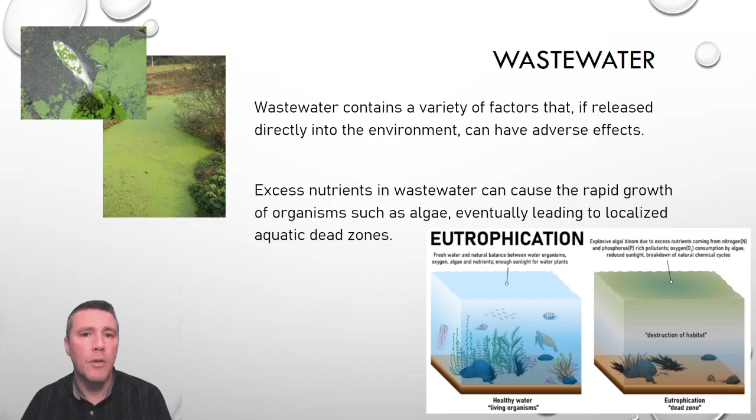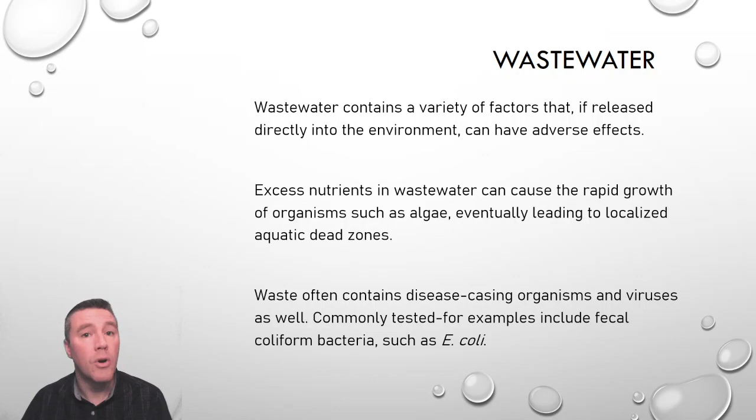The third concern with wastewater is the pathogens it often carries. Disease-causing organisms are responsible for a number of diseases that can be contracted by humans or other organisms coming into contact with or drinking the contaminated water. Such pathogens cause things like cholera, hepatitis, diarrhea, and other gastrointestinal illnesses.

Hepatitis is becoming increasingly common, even in industrialized nations like the US, due to inadequate sanitation practices, especially in restaurants. Cholera, more common in developing nations, claims thousands of lives annually.

Since it should now be clear that wastewater must be dealt with in a special way to mitigate the potential harm caused by its contents, what is done to treat it?

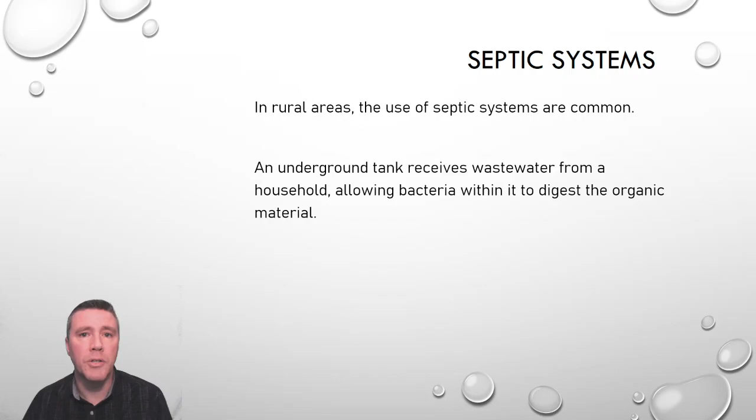In rural areas, septic systems are the most commonly employed mechanisms to remediate sewage. Homes essentially treat the wastewater generated within them using an underground system. A septic tank is a large container that receives wastewater from the house. A variety of capacities of these tanks are available to consumers based on the volume of waste that the home could produce.

Buried near the home, the sewage flows out of the house with gravity and into the septic tank. Solids settle to the bottom, and over time, bacteria in the tank break down the wastes. The fairly clear water that forms over time, called effluent, moves out of the septic tank, again with gravity, and into the leach field. Made of a combination of perforated pipes, the leach field allows water to seep out into the surrounding soil.

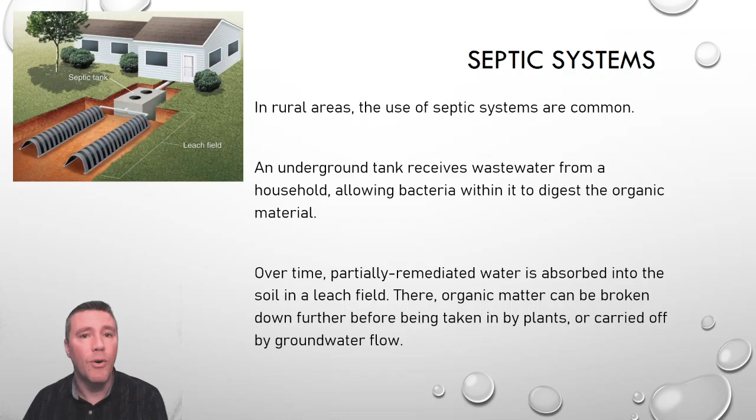Where it can be remediated and filtered further by soil microbes. The water can then be carried off by groundwater flow, taken in by plants, or end up in surface bodies of water.

Although household septic systems work well on a small scale, especially in rural, low-density areas, they are simply not feasible for urban or suburban environments. The higher population densities and lower availability of open land demand a different strategy.

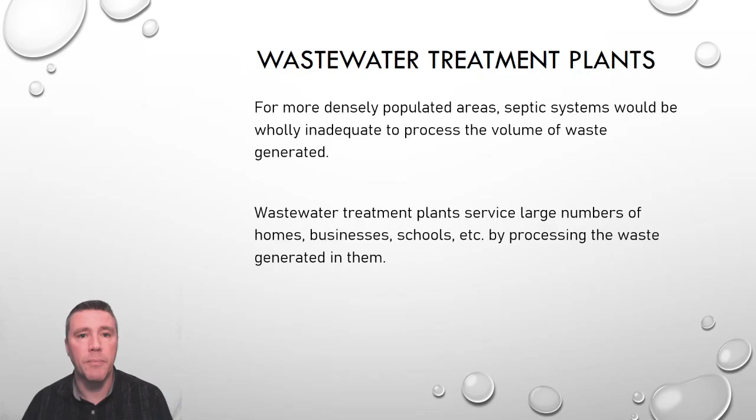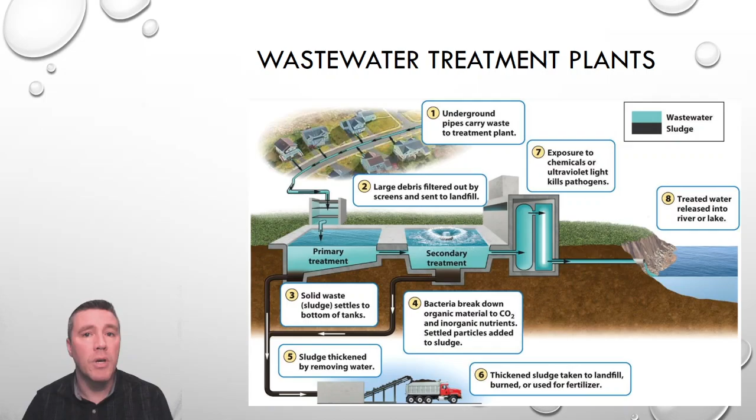In developed nations, centralized sewage treatment plants are that strategy. In a traditional wastewater plant, the wastewater from homes, schools, and businesses is treated in a multi-step process before the clean water is released back into the environment. Although there are variations in design and techniques used to treat the wastewater, all modern sewage treatment plants rely on the same principles.

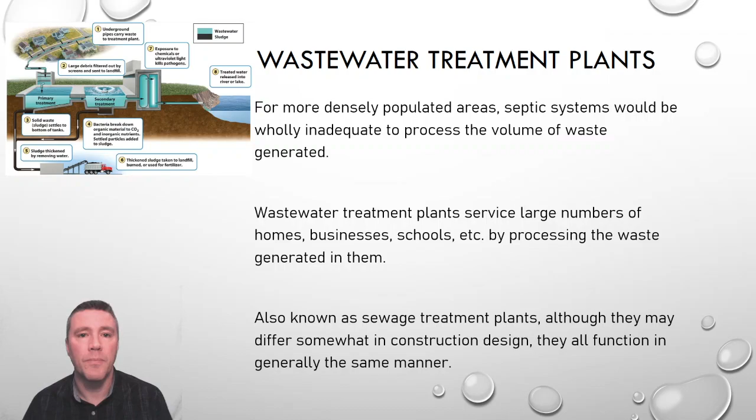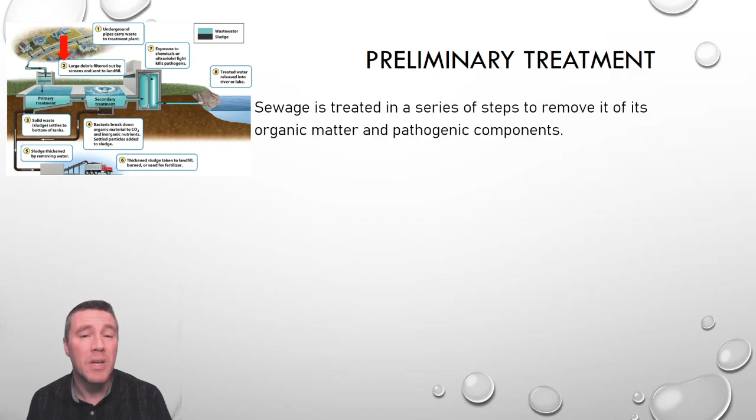Before any treatment of waste can begin, a filtration step exists as pre-treatment of the water. This screening process prevents large objects from entering the plant's plumbing system that may damage it and the pumps that push water through it. Twigs and tree branches, disposable wipes, rocks, small stones and gravel, and plastic waste, along with anything you can imagine people flushing down drains at home, are blocked in this preliminary treatment. Other non-waste materials settle out in the grit chamber before the sewage to be treated continues on to primary treatment.

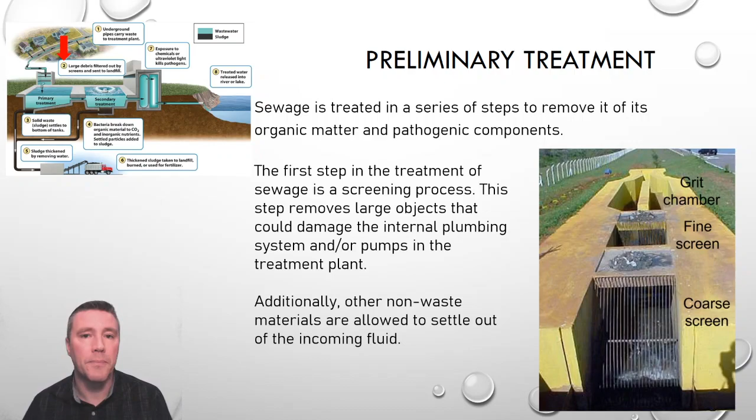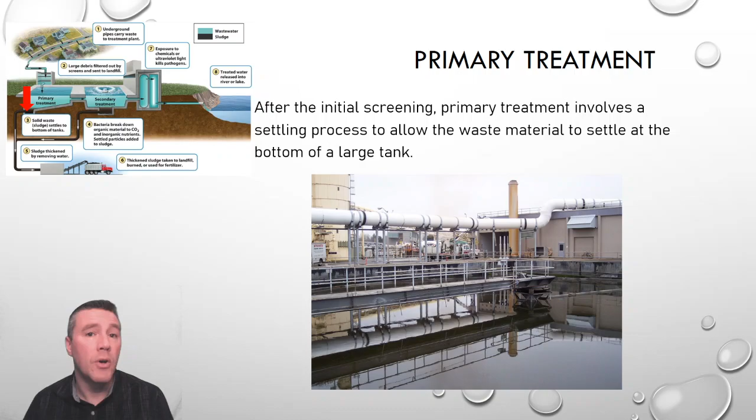The next step in the treatment process allows the waste to settle at the bottom of a large tank. The more dense, solid material is allowed to sink to the bottom of the tank, whereas oils and fats rise to the top due to their lower density, and are then skimmed off. Since settling tanks are usually equipped with mechanically driven scrapers, they continually drive the collected sludge toward a hopper in the base of the tank, where it is then pumped to sludge treatment facilities before being hauled away, often into a landfill.

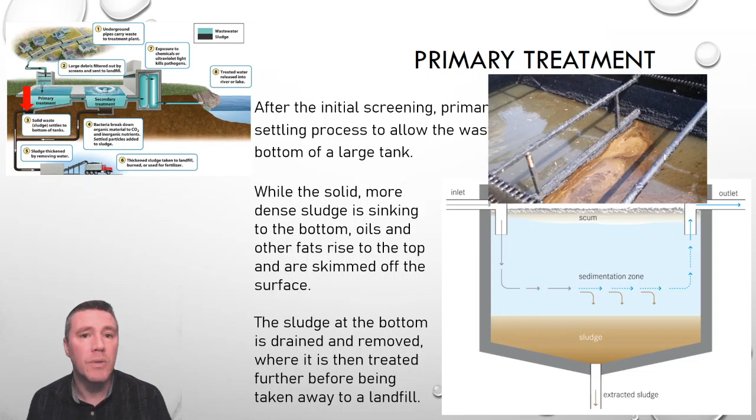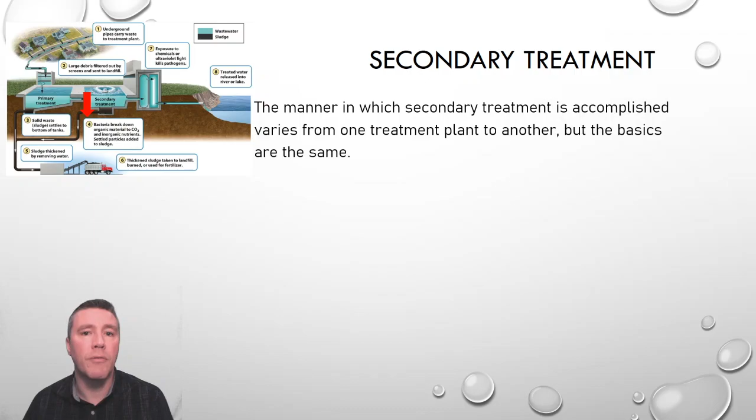Secondary treatment, regardless of the specifics on how it is accomplished, always involves the employment of bacteria to break down the organic material in the wastewater. The bacterial population, fed by the constant input of sewage, grows in biomass and sinks to the bottom of the tank.

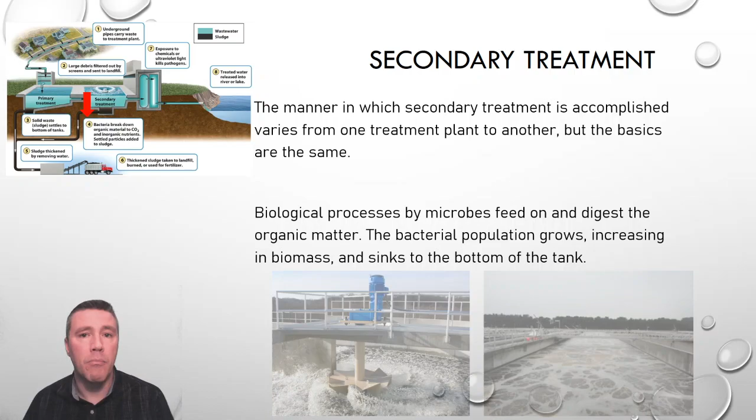Secondary treatment typically includes a method to aerate the water being treated. This adds oxygen to the water, promoting the growth of aerobic bacteria, which produce less offensive odors than anaerobic bacteria do. The remaining water, mostly clear and nearly free of pollutants, moves on to the final stages of wastewater treatment.

Disinfection of treated sewage may be attempted to kill pathogens before being released into the environment. The purpose of disinfection in the treatment of sewage is to substantially reduce the number of pathogens in the water before it is discharged back into the environment, or reused. The effectiveness of disinfection depends on the quality of the water being treated, the type of disinfection used, the disinfectant dosage or duration, and other environmental variables. For example, water with high turbidity will be treated less successfully since solid matter can shield organisms in the water. Generally, short contact times, low doses, and high flow rates of water all work against effective disinfection.

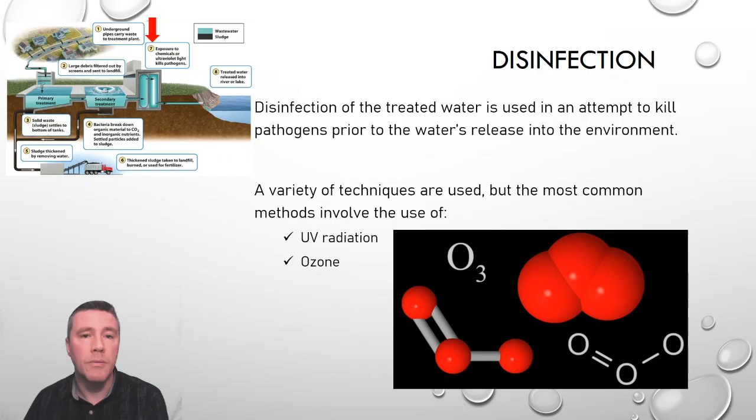Common methods of disinfection include ultraviolet radiation, ozone, chlorine, and sometimes even heat.

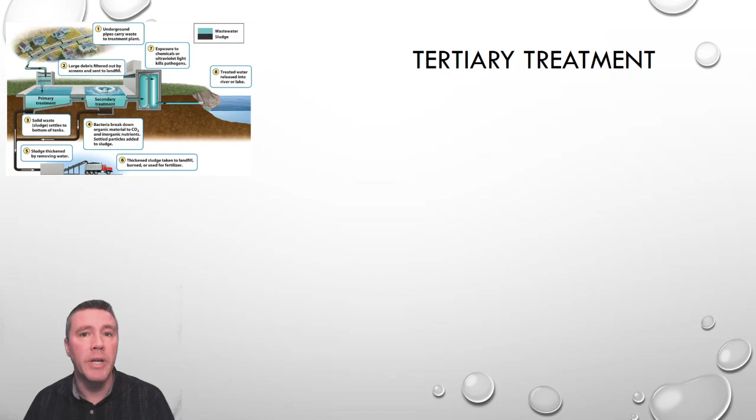The purpose of tertiary treatment, also called advanced treatment, is to provide a final treatment stage to further improve the effluent quality before it is discharged to the receiving body of water or reused. More than one tertiary treatment process may be used at any treatment plant. It is also sometimes referred to as effluent polishing. Tertiary treatment may include biological nutrient removal, disinfection and removal of micropollutants, such as environmentally persistent pharmaceutical pollutants, and involves a variety of techniques.

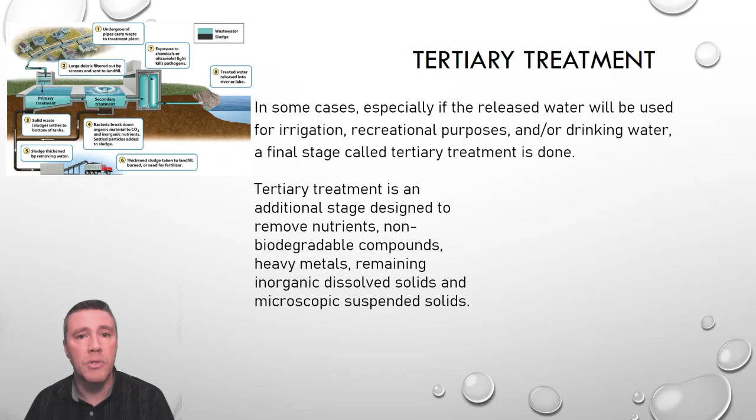Reverse osmosis is a water purification process that uses a partially permeable membrane to separate ions, unwanted molecules, and larger particles from water. In reverse osmosis, an applied pressure is used to overcome osmotic pressure, and it can remove many types of dissolved and suspended chemicals, as well as biological ones, mainly bacteria, from water.

Activated carbon, also called activated charcoal, is a form of carbon commonly used to filter contaminants from water and air, among many other uses. It is processed or activated to have small, low-volume pores that increase the surface area available for adsorption of minute particles, or to provide a site for chemical reactions that remediate toxins.

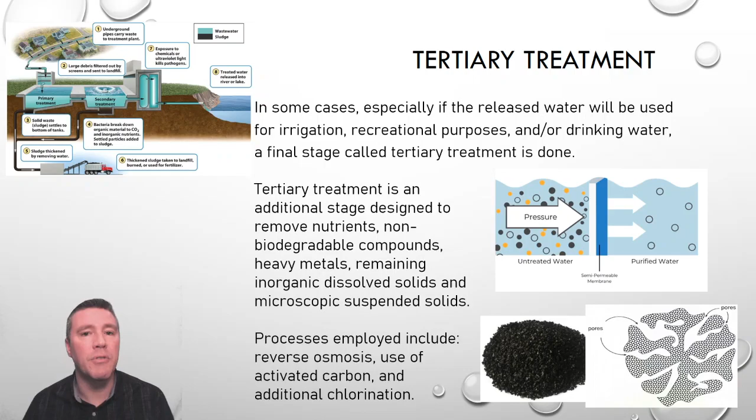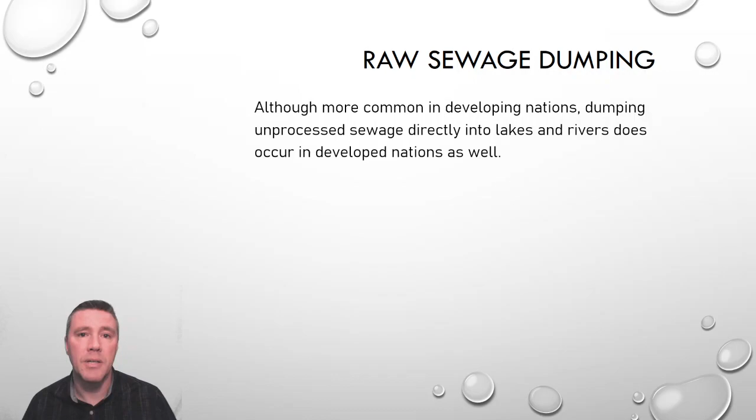Sewage treatment plants are critical to human health, particularly in densely populated areas. However, in developing nations, even those with large populations, dumping raw sewage into waterways is a common occurrence. But it might be surprising to know that even in the most developed countries, raw sewage can sometimes be directly pumped or released into rivers and lakes.

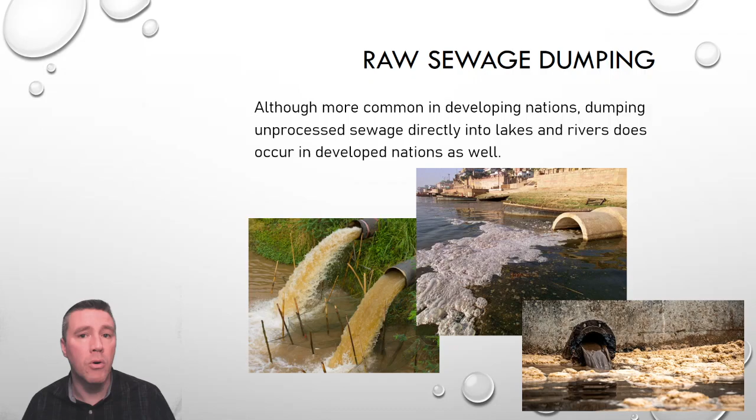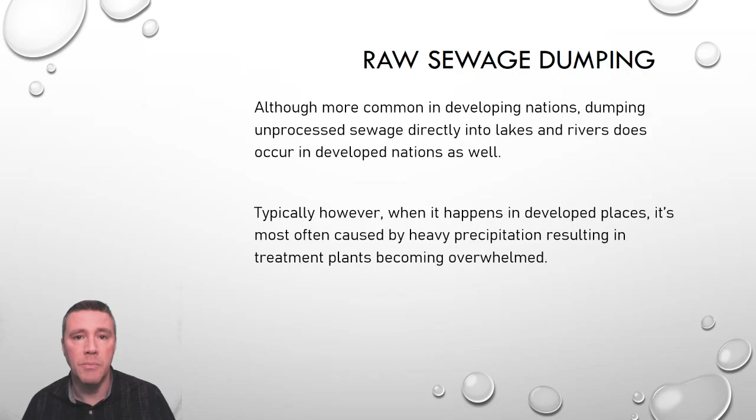Sewage treatment plants are built to handle the wastewater from local households, businesses, and industries. However, many treatment plants, especially older ones, also receive water from stormwater drainage systems. During periods of heavy rain, the combined volume of rainwater and wastewater exceeds the capacity of the treatment plant. When this happens, the treatment plants are legally allowed to bypass their normal treatment processes and release the storm and wastewater back into the environment.